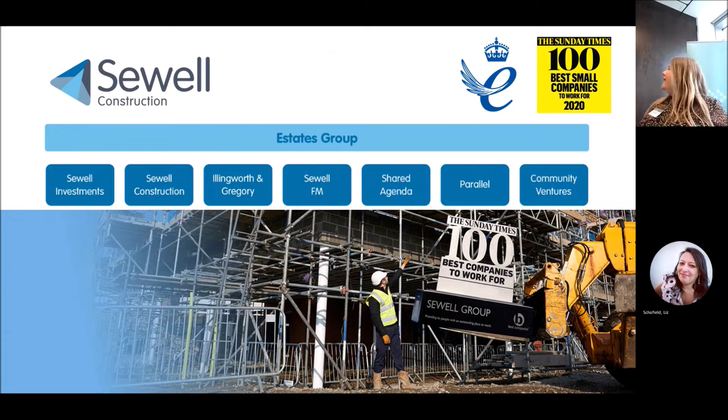So a little bit about Sewell Group and Sewell Construction. Sewell Construction are part of the wider Sewell Group, and on the screen you can see the estates arm of the company structure. Also last year we received the Queen's Award for Enterprise for promoting opportunity, as well as being recognised as a Sunday Times Best Company to Work for. So the Sewell estate offers and provides a fully holistic approach to project management, and this is from investment and project planning stage through to construction of the new build or refurb, following on with our dedicated facilities management offering and estates planning services as well.

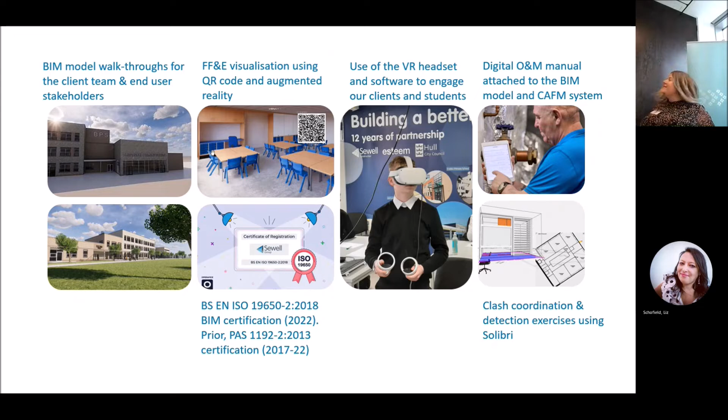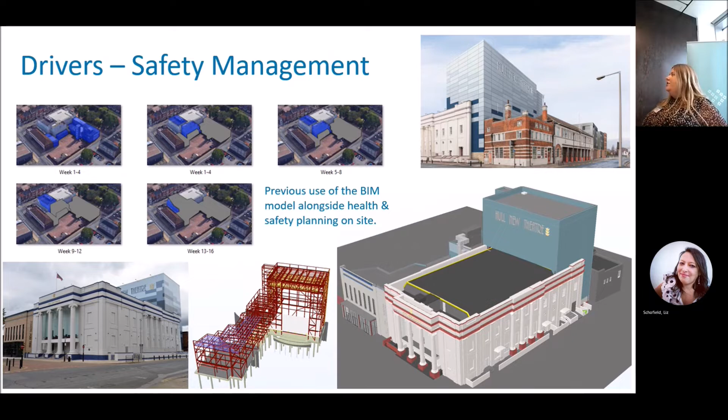This slide shows a project, Hull New Theatre in Hull, a project from about 5, 6, 7 years ago that I wasn't involved in. I've included it because our project manager at the time, now our construction MD, utilised an existing point cloud survey of Hull New Theatre alongside the BIM model and Google Earth to create various safety phasings week by week, discussing that with the supply chain and the lads on site. So even though it's not VR and a lot clunkier than what we'll talk about today, it's something Sewell have wanted to do and have implemented in the past.

We'll start with an overview of virtual reality to give you a flavour of what it's all about and how it came about. Virtual reality is a relatively new technology, but it's actually been around quite a while in different guises. It's part of a wider set of immersive technologies, probably the most common one you'd suggest when you mention the word immersive technology. It usually comes in the form of a headset, though it can take other forms. The one we're talking about today is a headset form.

In terms of its use in the industry, it's one of those technologies people have left alone and not really engaged with much, but it's becoming more accessible as equipment becomes more available and the technology becomes more efficient, so it's becoming more integrated into the industry. It's been quite a challenge as an acceptance technology in our sector, even though in other sectors it's been quite useful and widely used. It's been a difficult nut to crack within the construction sector.

In terms of its potential, today we're talking about health and safety integration, but it has other benefits generally. From visual walkarounds, particularly for clients and end users to walk around their environment - of course you can do that on a screen, but immersing yourself gives you a sense of scale - to design coordination, getting things correct and detailing correct prior to construction, which can be a lot beneficial in terms of cost.

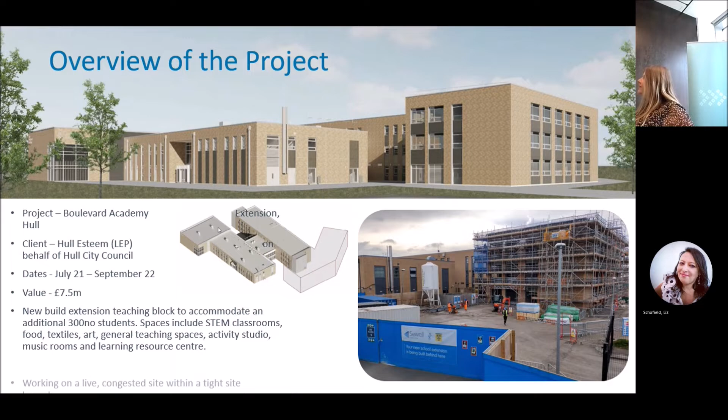Okay, so I'm going to talk to you about the process we went through as a bit of an overview. Obviously there's more intricate details to go through here, but I've given it as a summary of how we actually integrated it into the process itself.

So step one, understanding organisational requirements and needs. Here we tried to understand what the potential was for the company, how we could embed the technology into the company itself, the key drivers, whether it's from a company perspective or client demand, those types of things. We looked at some of the challenges we faced as a company as a whole, which led into stage two, which was to plan the implementation process.

So we looked at different hardware available, different software that we could use for the project, and tried to select an appropriate project to trial this on. We had a look at connectivity on site, because we're using it on site there is that issue of the temporary environment we looked at as well. And then we looked at communicating with the supply chain. As we'll look at later, we used a particular element of the building, which was the steel frame structure, so it was getting the supply chain on board as well with the main contractor.

That led into stage three, which was the implementation. So we planned it, looked at the organisational needs, and then it was a case of implementing it. And we did that via collaborative workshops. So prior to the construction activities on site, we had the site management team, the quantity surveying team, the subcontract team, and the site operatives involved on site with the headsets, talking about the project. I'll show you some photos and videos of that later on.

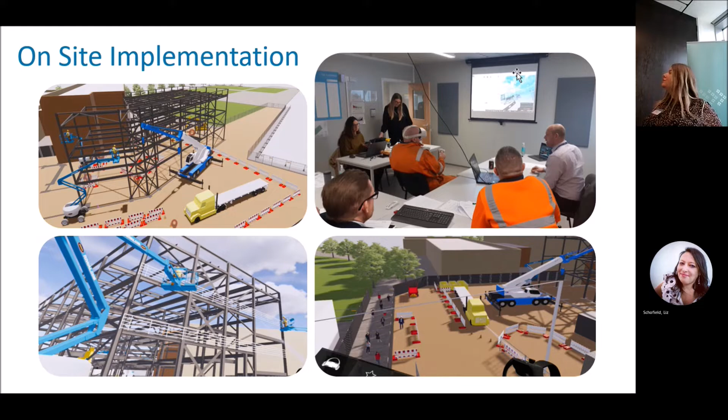So hoping the video would work. Don't like it, does it? Doesn't like that one. We can do that as part of the round table. Yes, we can look at that later.

So the video would have shown the virtual reality environment working there. But you can see again on the right side picture, we had everyone involved in the process - the site operatives, the site management team - and you can see the interaction with everyone, literally going up, looking at what's happening, stopping it, freeze framing it, finding out where we're going to put things and logistics issues we found along the way.

So on-site, real life implementation of the software with everyone involved in a collaborative way. There's the video. I had to click the button on there.

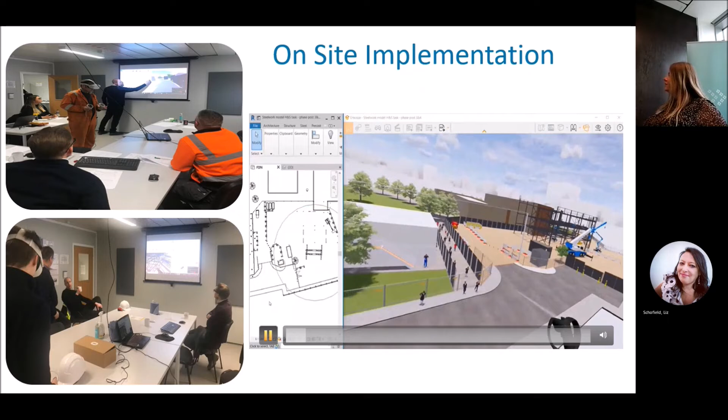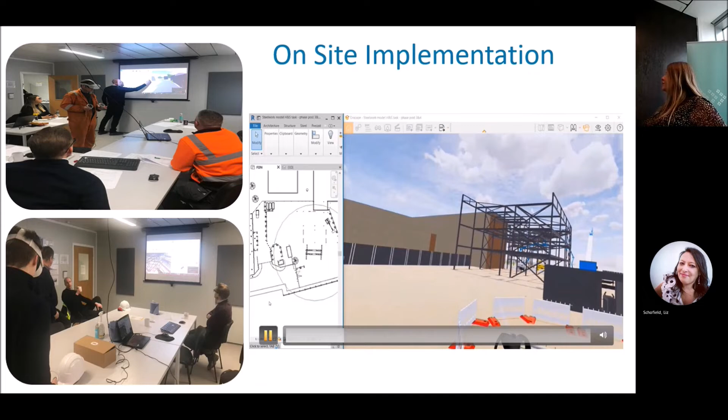So you can see there, we looked at obviously entrances and exits of the build. We looked at how we can segregate. You can see the site cabins there and the entrance and exits. What we found really useful with this headset environment was you can get to locations you just can't get to anywhere else. And bear in mind, there's no steel up at the time - this was all a fresh site, doing this quite far in advance.

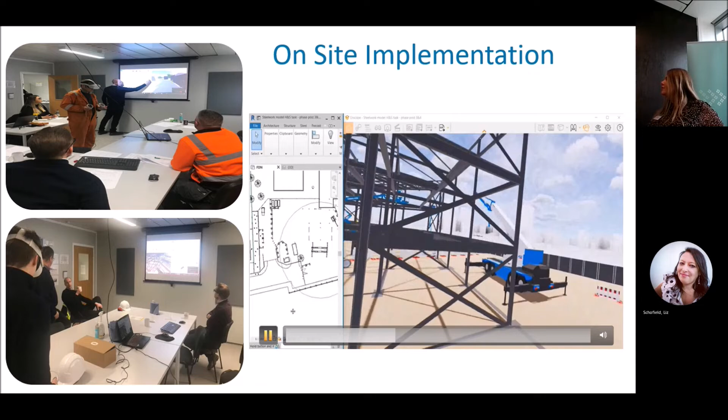In this example here, looking at the crane, we can see that we're going to put the steel columns up in that far left corner there. So is the crane in the right location? Checking that out. Simulating where we're going to put the MEWP, that vertical elevation - you can see from the model, that's what the MEWP would have done.

So how are we going to receive the column? Well, it's going to come over this way. Can we then segregate the deliveries off properly? Well, yeah, we can do. So where we're going to put the segregation, we're going to put it there.

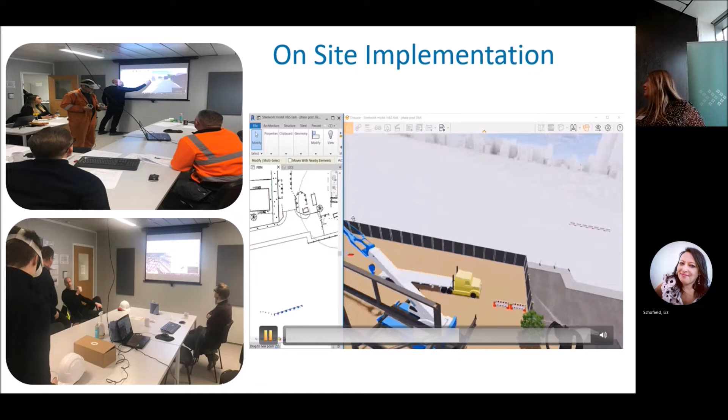So we can insert the barrier fencing, for example, which will pop up in a second. And we can trial it - is that going to be enough room to get further deliveries through or not? We can see that the crane is going to lift the column into that far left-hand corner. So we can sort of discuss it.

Is that the right sequential order? Do we start from front to back? Do we start from left to right? How do we do this? Can we test it out? And you can see there...

We're moving some of the MEWPs around. So we've got the MEWPs there, and just move them to the centre of the building. And maybe that MEWP there needs to move further over as well. So we can start to move equipment around, look at logistics planning.

But the main thing was getting the site feedback, because at the end of the day, the management team aren't the ones on the cherry picker, they aren't the ones driving the crane. So the guys on site get that feedback, and we can start moving things around.

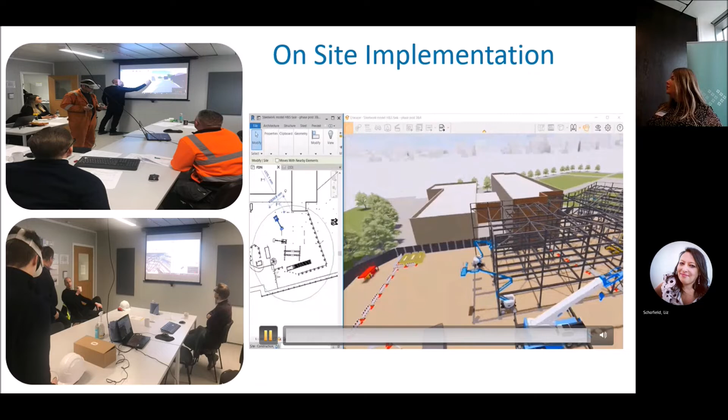The other thing that was quite useful as well, just looking at the video, was that the site team and the subcontract team were doing that one piece of work, but there's other pieces of work happening on that project. So it was communicating that as well - whilst that's happening, this groundwork is doing drainage, so how do we then segregate those two teams apart?

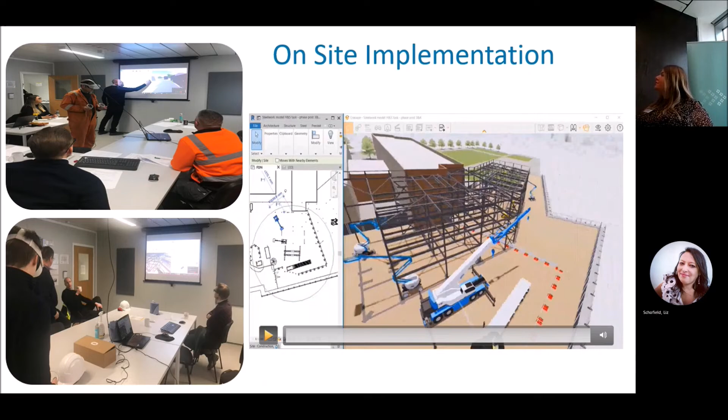Okay, so as I mentioned before, we did a bit of work on the feedback. As I mentioned before, virtual reality has been a bit of a hard nut to crack in construction. I've found that with my own experience and that of others. So some of the main benefits we found, and again, this is a trial.

We found that the virtual reality environment was a really quick point of reference. Rather than having to look through 2D drawings or even a 3D model on a screen, you can instantly see where you were on that model and how it's going to go pretty quickly - an instant point of reference. We weren't trying to explain how the school works or how the entrance and exits work. It was instant. Everyone could see that clear point of reference.

It engaged the team instantly. The site operatives involved were getting really involved with it. They were moving things around. They were sat there as if it was in the crane - where we're going to put that, where we're going to put this. It was almost instant engagement with the team.

The feedback from the site management team was that it did allow them to communicate with the operatives who were about to do the work very, very quickly and easily at a single point of quick reference. It's non-typical for the lads on the ground to come up into the site cabins and be part of informing those RAMs. Usually they're desktop - they come to site, the site manager checks them - but there's not that whole team approach and collaboration, and it allowed for that, which has been really beneficial.

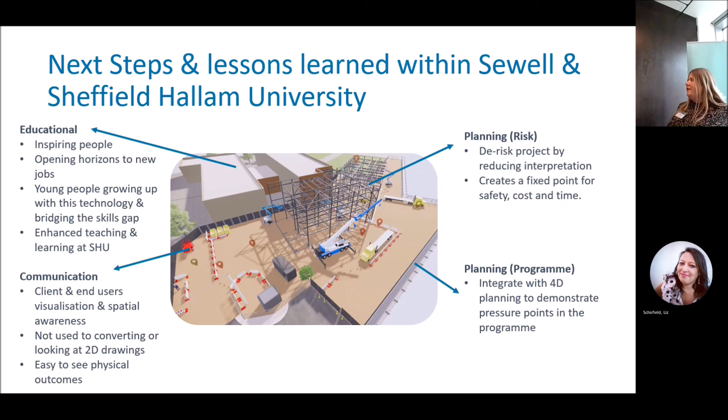Communication-wise, we've touched on clients and end users, visualisation and spatial awareness, and them not being used to looking at traditional construction drawings - it's really easy to see physical outcomes. From a design management and project management point of view, obviously risk planning, time programme, really important on site, and it's a massive plus point in that we can de-risk the project by reducing interpretation and creating a fixed point for safety, cost and time. We can also integrate with 4D planning to demonstrate pressure points in the programme, amongst other things. It leads on from what Gordon was saying earlier, really.

Thank you. Oh, thank you.